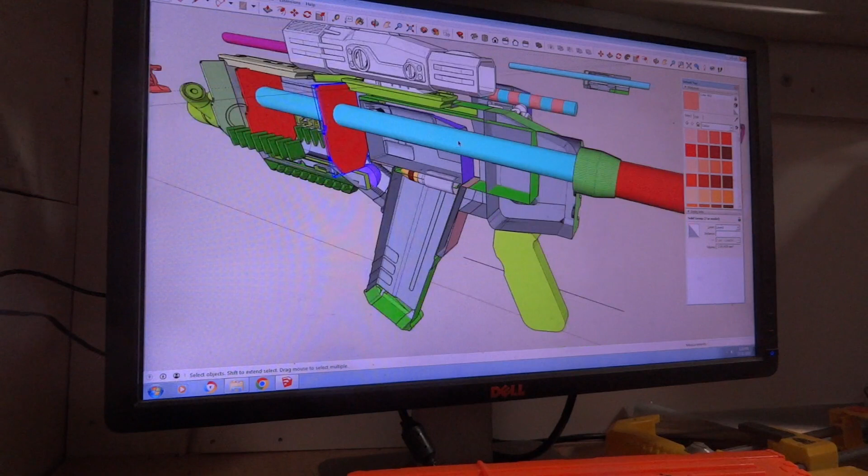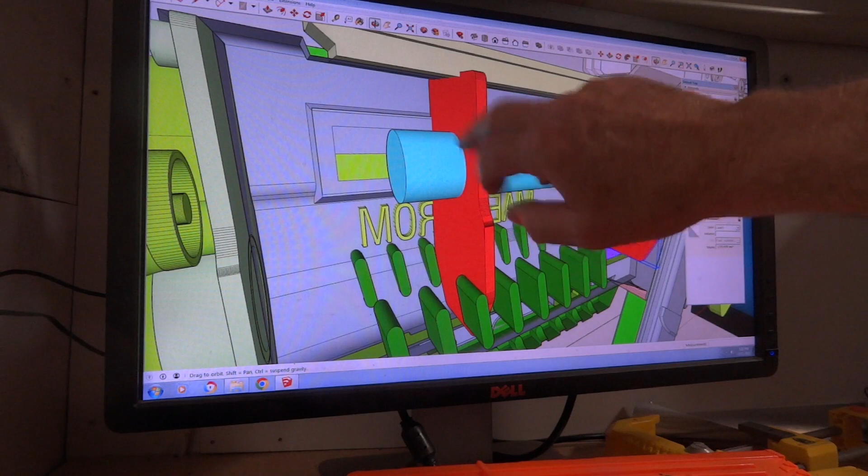Right guys, now here's our mock-up of the pipe. This blue goes all the way back through here, starts up the front, and we'll probably have a plate in there, moulded in a lot better, but a fixed plate in there, or lugs built into the side with sloped support, so when it prints it doesn't need any supports. And then we'll print out two plates with a hole for this, and it'll screw straight in, one there at the front, one towards the join that's going to be around here somewhere.

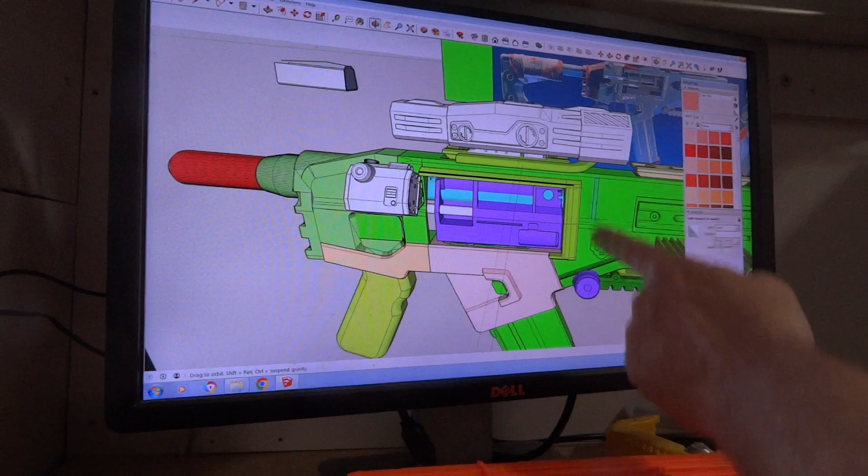Not actually sure, but what I was thinking last night, what I might do is make this section from about here to here one of the sections, and have a plug built into that so it plugs into the back of this section, and in that wall, in this part, there will be that plate and that hole.

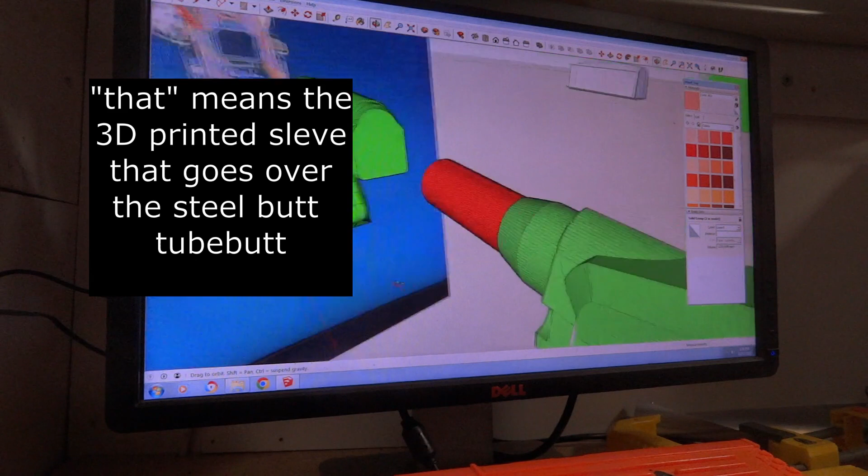And the pipe goes all the way through, and this little red one represents this one I've just printed, which is a nice snug fit, so that could fill out the back of that and still fit with the actual buttstock. Goes in fine, won't be anything hanging over, so that'll be good.

And what I've done with the pipe, when I finally got the right size, I took it into the bolt, intersected with the bolt, and now when you move the bolt, you get the movement of the barrel. You can see it going through, which is pretty cool, I reckon.

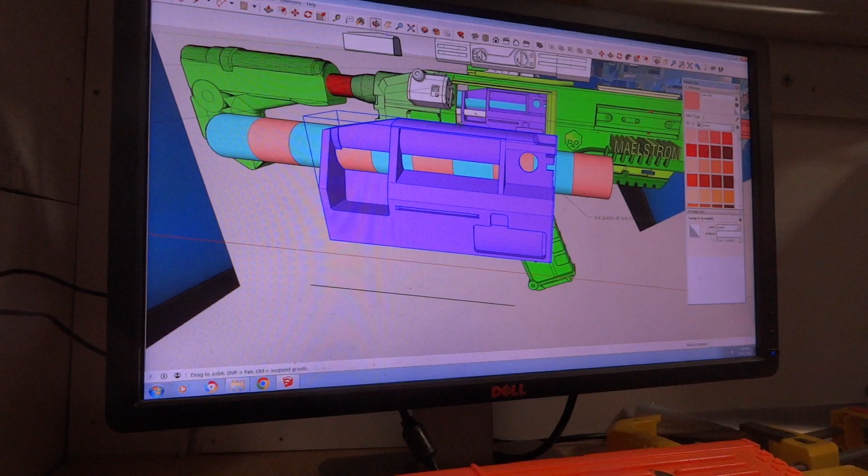And I'm probably going to put in a cocking handle, maybe using one of these holes, extending this out a bit and putting a nut in there that I can screw something in. I'll have to put a cocking handle in because you want to be able to see the bolt move. A couple of things I've still got to work on.

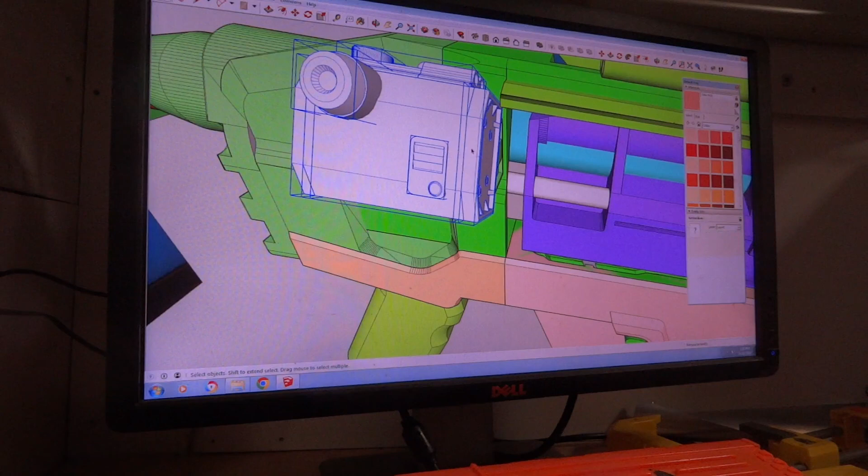Oh, I did this little box as well, this whatever-it-is round counter, and what I've done with that is I've made it all into individual pieces. I haven't combined it yet. When I do, it'll probably be the center section with all these things stuck to it, and then the two ends. And the front end's pretty basic, very simple.

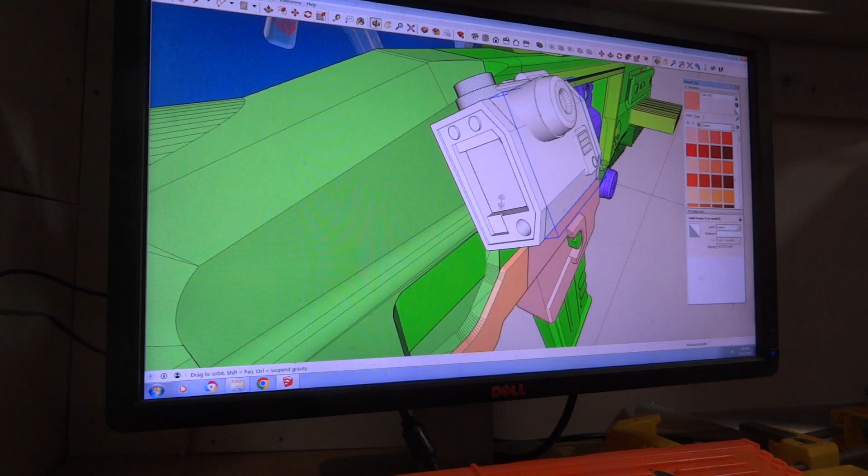The back end, it looks as if it's got a round counter in it, so I might see if I can find one to fit in there. So I've recessed that and got a hole ready for an LED light. Things got LED lights all over it.

But that's where I'm at the moment. So I'm pretty happy with that little thing. I'll get to combining that all later. I'm pretty happy with the barrel and everything. And I think I'm virtually done, except I've just got to go over and do all the little details. So I like those two little lugs there, I've got to add them to here. And there's all little bits and pieces all over the place that I've got to sort out.

So I'll also use these two rods. I'll just anchor them at either end straight through. And so this end of the rod will also be anchored into that end cap that'll be built into this part. So it's two on either side, and it'll be very well supported.

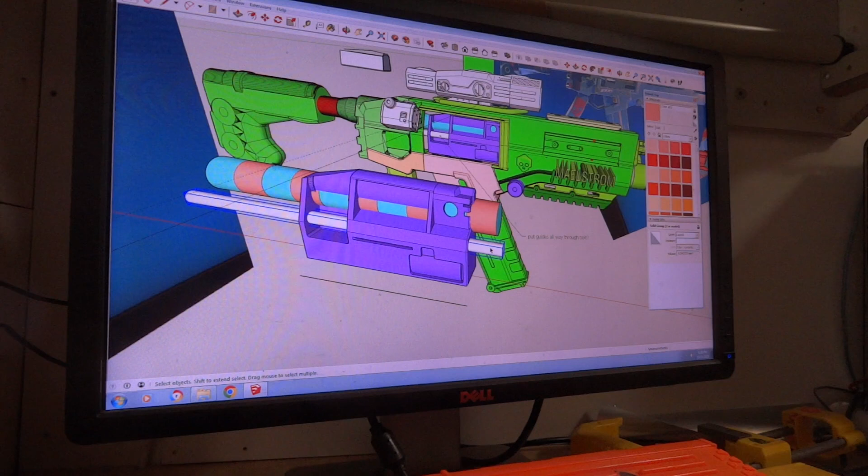I'll make them out of like aluminium tube or some copper pipe or something, so it's not like it's going to be plastic and it's going to snap. And we'll find a Nerf spring that'll fit the back of this, which shouldn't be a difficult problem, and we'll chuck it in the rear end.

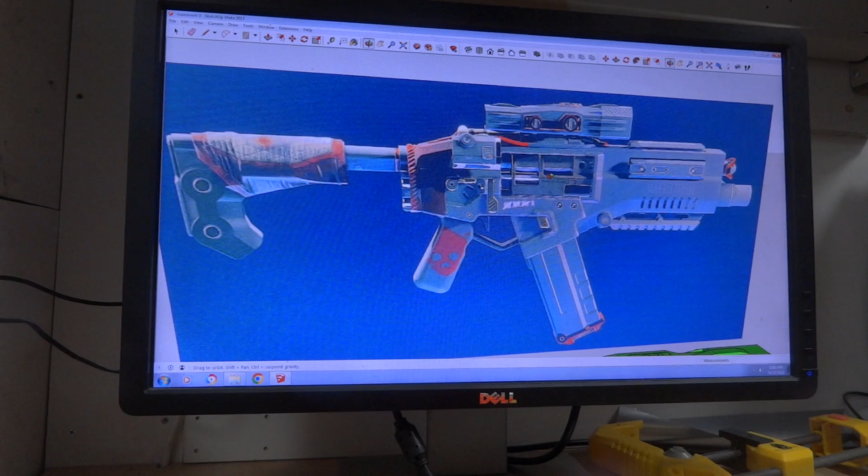Hi guys, Andy Work back in. I was hoping to avoid this, but it happened anyway. The last place we left off, it looked pretty unfinished. Well, today I've just sat down for 3 hours and made a lot of progress. There's our Maelstrom. Now there's still areas to finish.

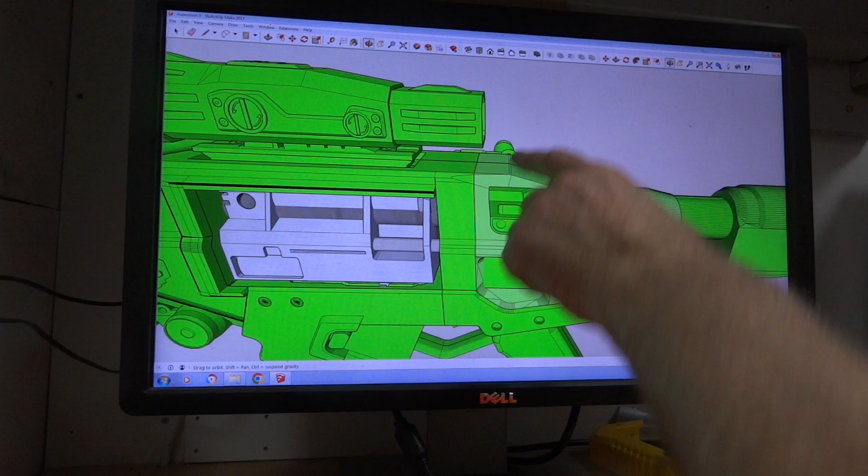I've still got to do all these switches and work out the internals so the bolt can move back and forward. But we've got the bolt, we've got our little doohickey box there. I've even modelled this little holder for that hose that comes over here. What I'll do is strap a couple of strips of metal, screw a couple of strips of metal that grip that hose, which you can see.

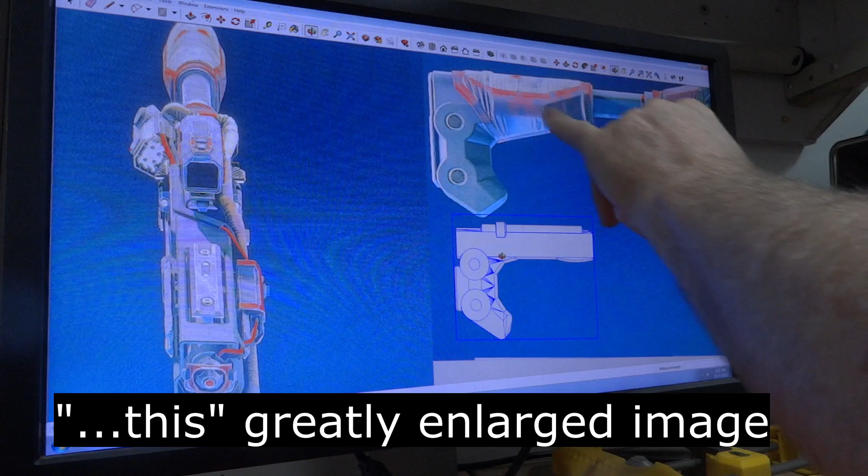When I did this I just had a flat plate, and obviously there's this big chunk out of it, and that necessitates the actual rear part going out, being wider. It's a different shape than I actually drew because I didn't observe it very well.

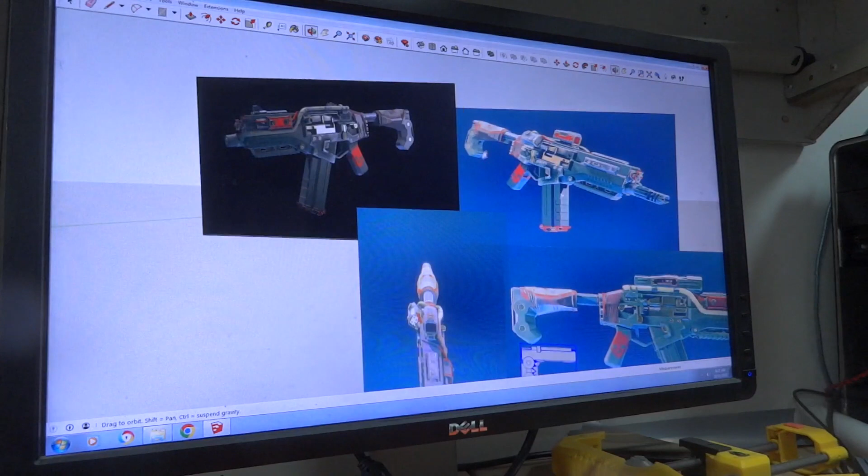There's a small half circle sort of chunk in the front that takes up a bit, then it bleeds out. In one of the other photos, it's a really good example, there it is. You can see how it sort of comes out at an angle. The trouble is it also goes back into this area here, and that part from the back is pretty good, I'm quite happy with that.

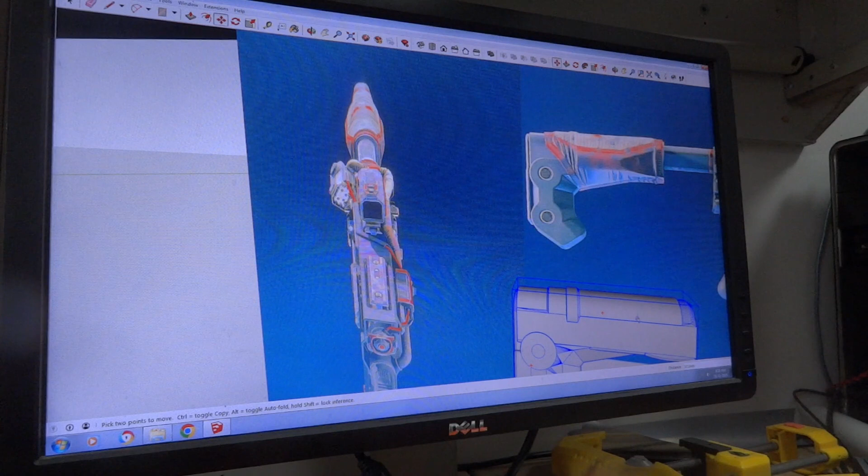I really don't want to do anything there because I spent a lot of time doing stuff there. So what I'm going to do is try and put this fat bit from here and blend it in just at this ridge, so it comes in about the same level as that. I'm going to see how I can do that. I have no idea, but I'll give it a go.

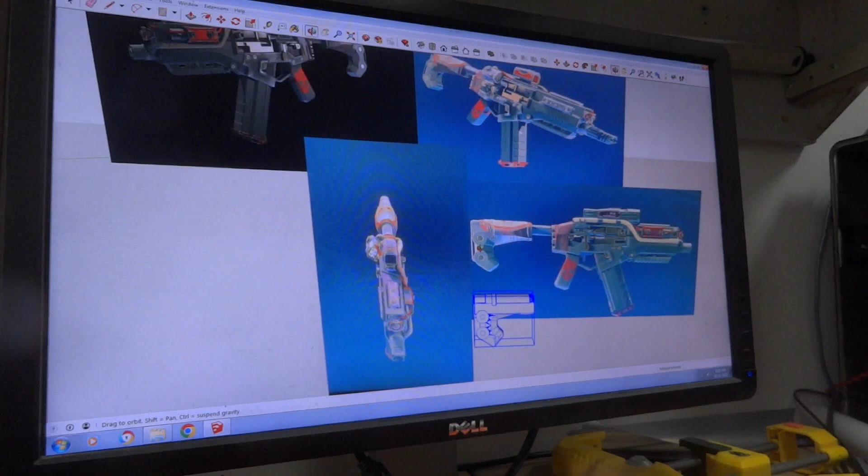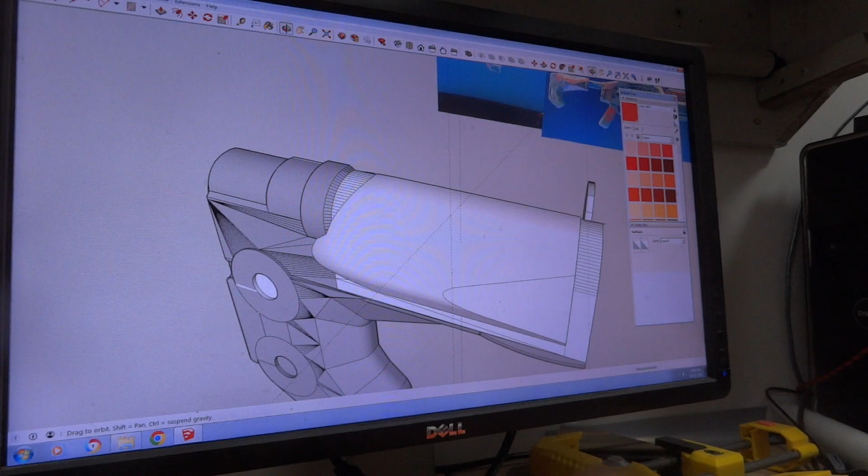I've just finished doing this piece, and it was basically just drawing this red shape here and extruding it along. What I did with SketchUp, there's a tool called the Follow Me tool, and you can extrude something along a curved path. So I've just dragged it straight along and then curved it down out of the way, and I'm in the process of deleting these parts, but it blends in there pretty well.

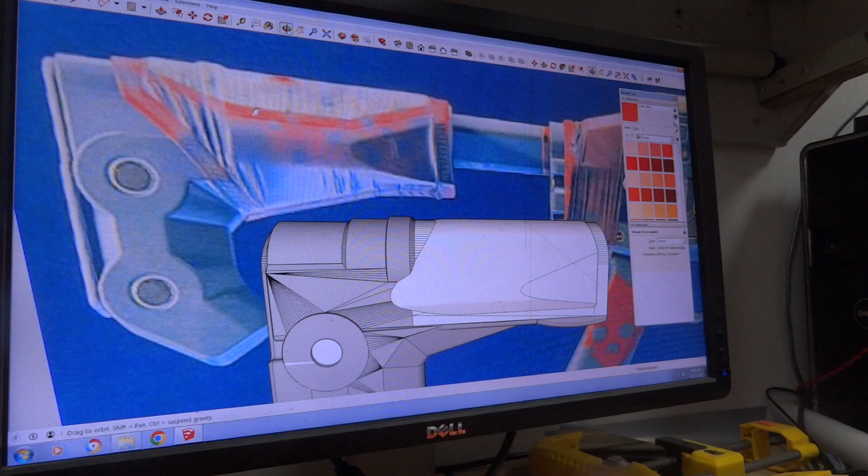As you can see, I've got the flat end and the curve that goes back, and it seems to suddenly stop here, which sort of makes sense. But I've just made it a curve to make it a little more aesthetically pleasing, and also so there isn't a sharp flat sticking out in the butt, because on the other side it would probably dig into your shoulder, depending on left and right handed.

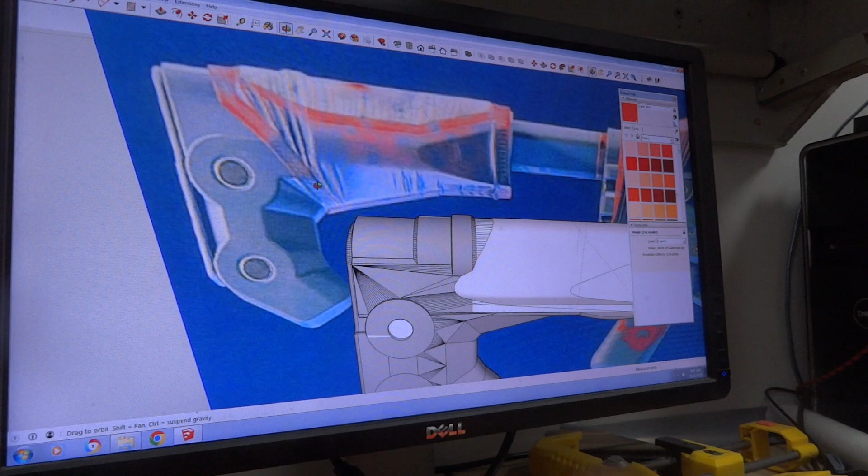It's going to be covered with this, I've been thinking of this as a pair of underpants because that's all it looks like to me, but I'll work out something there.

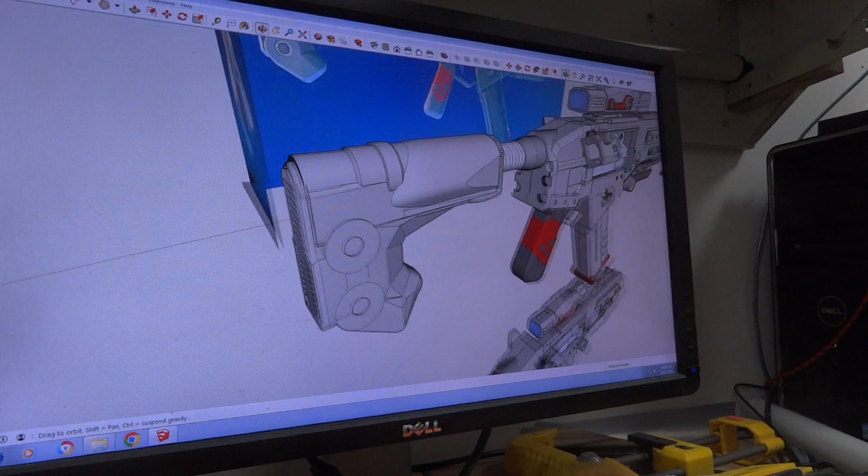So there's the original butt, and yeah, that area was bad, so was the front, but I managed to draw something a lot better I think. We've got this nice flat plate, and we've got the curved side, and I think it looks a lot better, also a lot smoother against the side of the shoulder and the face where you rest your cheek. That worked really, really well, so I'm very happy with that.

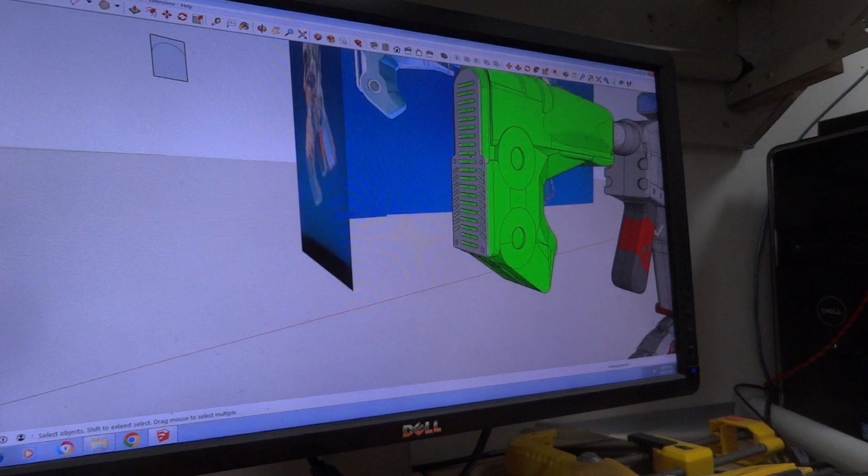And that now is going green, and it actually fits with the butt plate a bit better too. Now what I'm going to do is just put some points where these alleged screw holes are, put some protrusions, some indentations in the butt, and just glue it on. I want to print it separately so it's got a nice smooth surface.

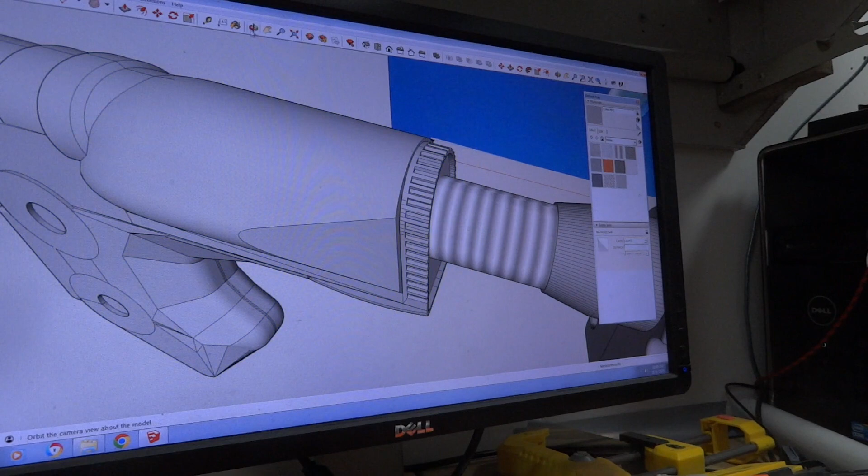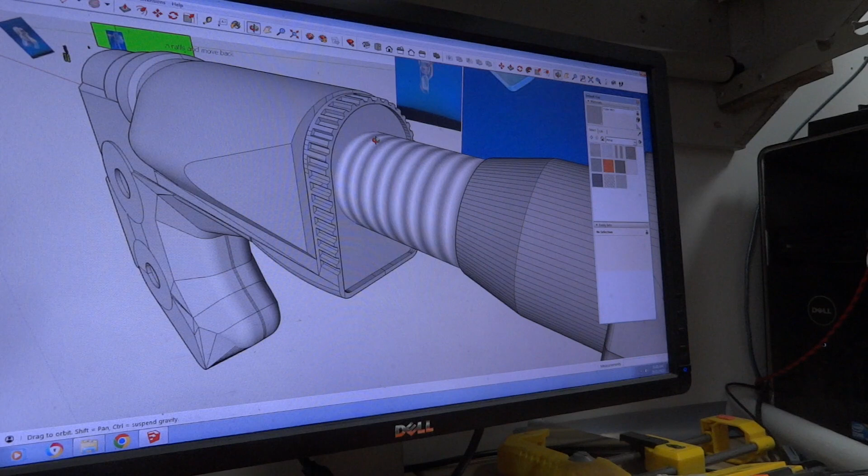Also, I've put all these little indentations around the edge here. You can just see them through in a couple of drawings. I don't know, it could be elastic on the underpants covering that, or probably is. But anyway, they're there. And obviously this area is naked, bare, because I haven't decided on the size of tube, and when I come to it I'll put a little bit of detail in there, but that will just have to wait for now.

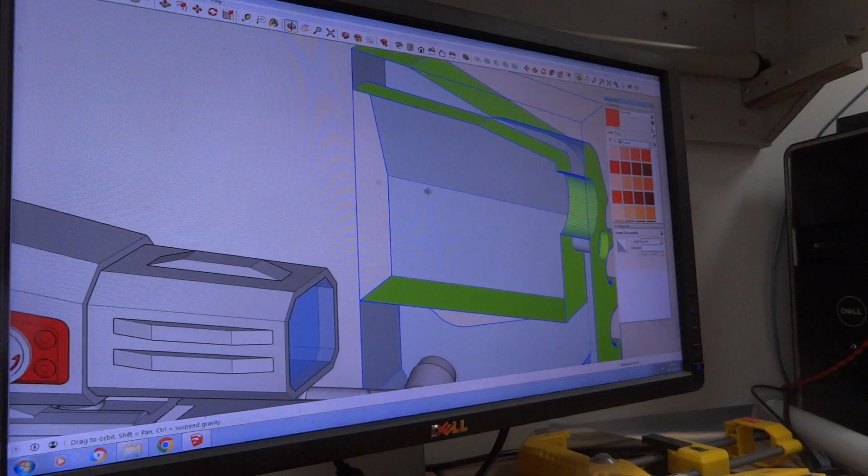So what I've done, this back end, I'll drag it up. I've cleared this space for the bolt to come back as far as possible, and I've incorporated a hole here which will take a bolt. Now luckily I've found some threaded rod in my shed, it's 6mm I think. I just got to get some nuts, and that will go through that hole right up to the front support plate.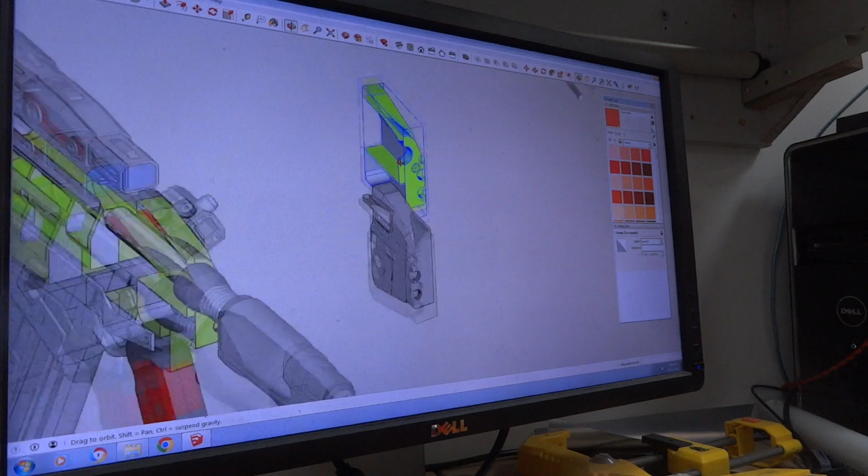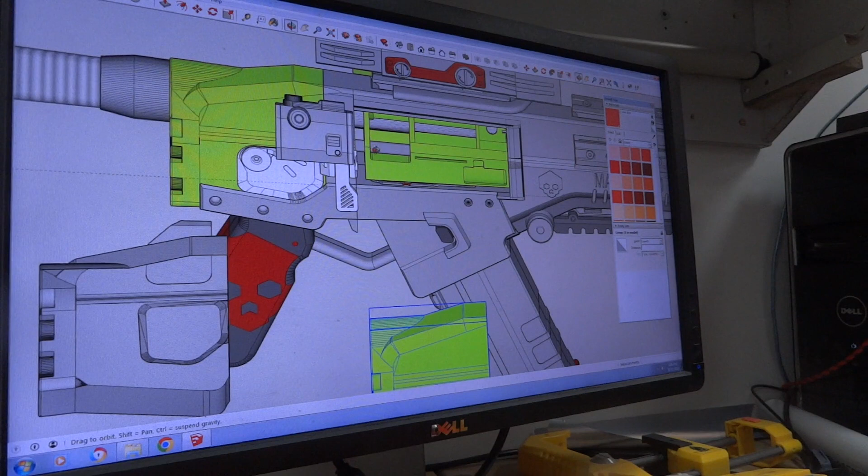So right through there, right up to here somewhere where there'll be a plate, and that'll be screwed in at one end and bolted in at the other, that sort of thing. So that'll give me a little bit of additional strength, and that will run through this piece of pipe, which is going to be from there to this bulkhead. That'll probably be about 8-10mm, probably 8, the smaller I get it the better. So that'll give me the 2 rods plus the piece of pipe the whole thing will be running on, which will be really well supported.

And in addition to that, that actually didn't take long, that took about an hour. The other 3 hours were just doing these 3 little bits, this detail stuff.

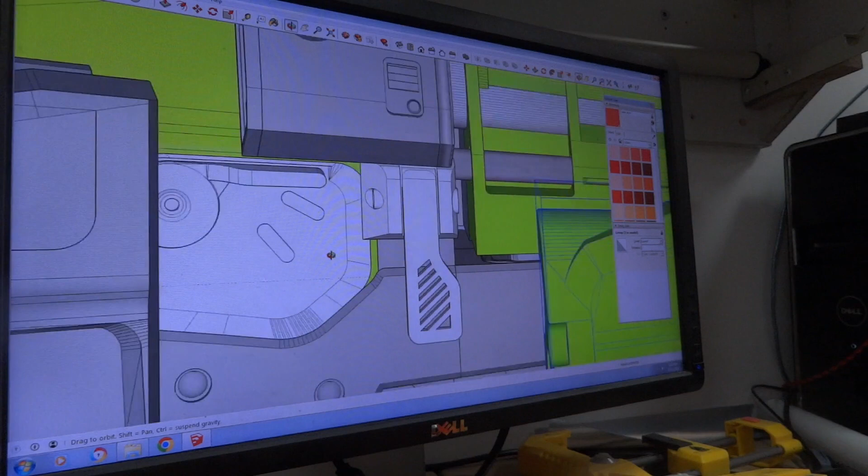Yeah, just doing this little stuff. The proportions to this and this flat switch thing, whatever it is, bolt release maybe, that's what it seems like to me. And they're still working on somewhere to put a cocking handle. Got to get to that. And that goes on both sides, so that's not a problem.

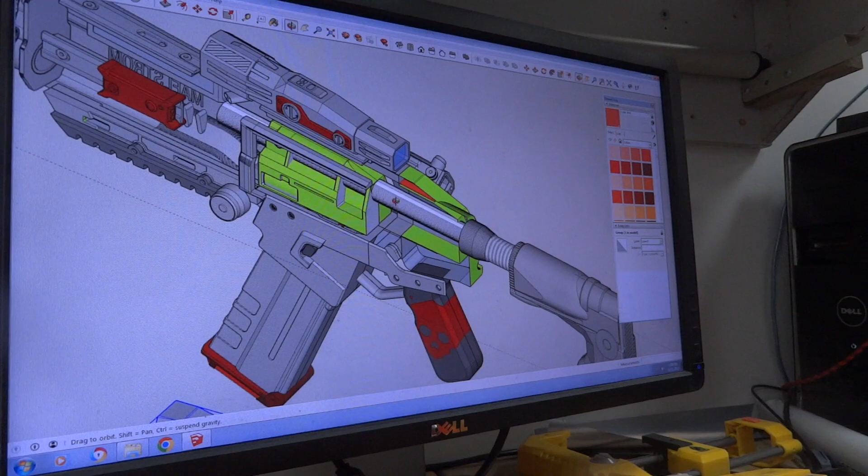I can just copy and flip that, and that's where I'm at. And I think that literally is the last major piece of detailing I have to do, so I can start working out where the cuts are going to be.

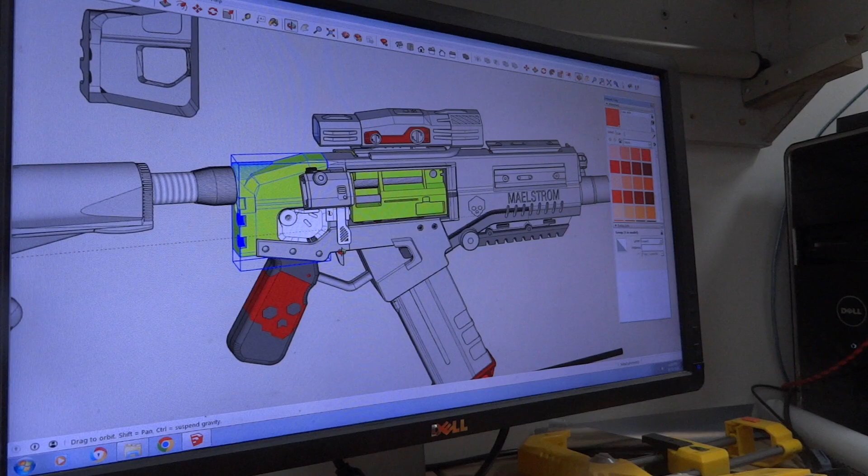Now what I'm planning to do, this green piece, I'm going to print as 100% filled, because it's got a lot of tension. It's got the pipe coming in the back, the two rods going up there, and it's a very small piece, and it's also got to have the pistol grip attached to it and a trigger mounted in it and all these things, which hopefully I will make movable. That can be 3D printed.

This thing I think I may actually have to cut out of a bit of mild steel and put a hidden pin through there, because it seems to pivot at that point. So issues to get on with and problems to solve, but I'll get there.

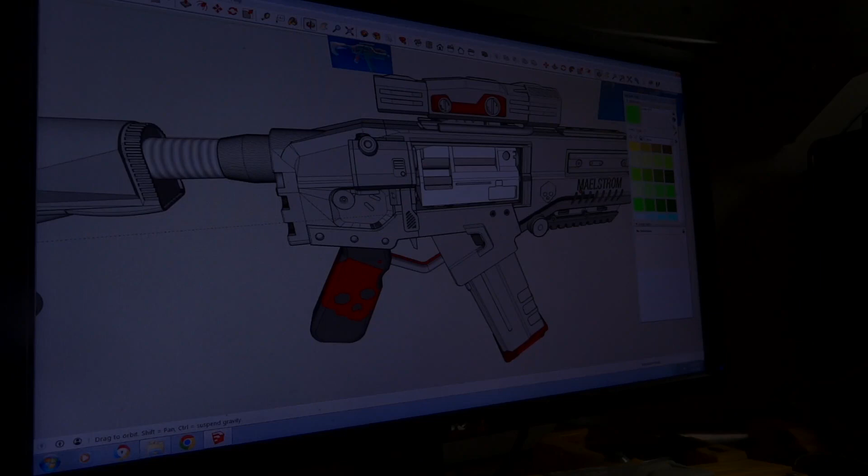Right guys, okay, just been doing some work. Now it doesn't look like much has happened, but actually a lot has. So what I've done is first remove that little bad clamp. I've got to redo that, that's not a problem.

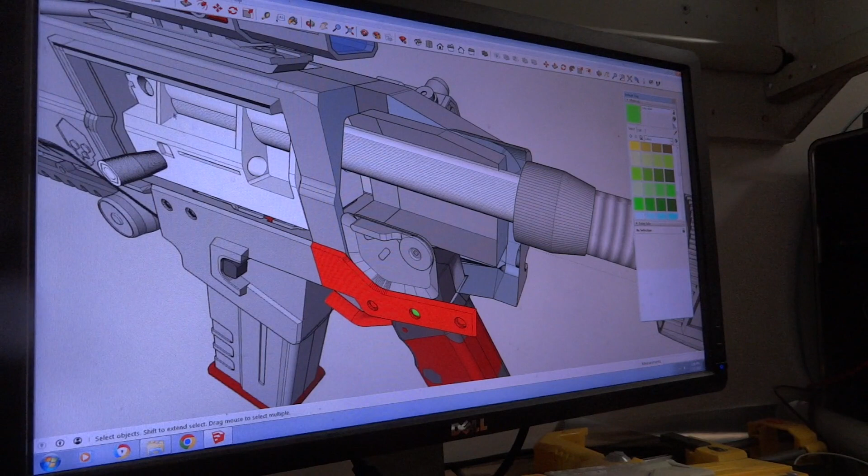And I've also, let me just remove that, modified these to take the rearward movement of the bolt, and it's matched to the front bit, so there's no edge there that it can catch and get jammed up on. So I've got that. There's the bolt there.

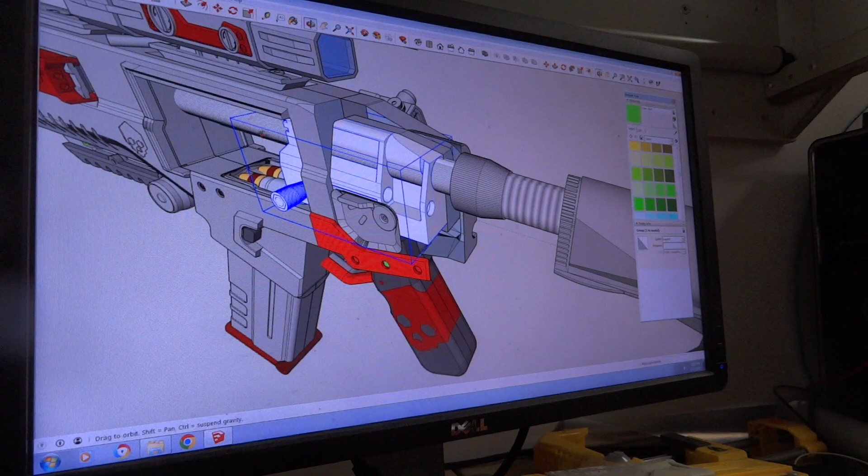I've even, when you draw back the bolt, let me just get it on this line, there we go, it goes back to about almost the wall, and this is the first time I've checked this, and the cocking handle I've put in is just hitting that, so that should be good.

What I've also done is recessed the front of this area. I'm going to put a piece of 3mm foam in there, so when this slams forward, nothing's going to be shattering and breaking. So there's that, done all that. Now get that back where it goes.

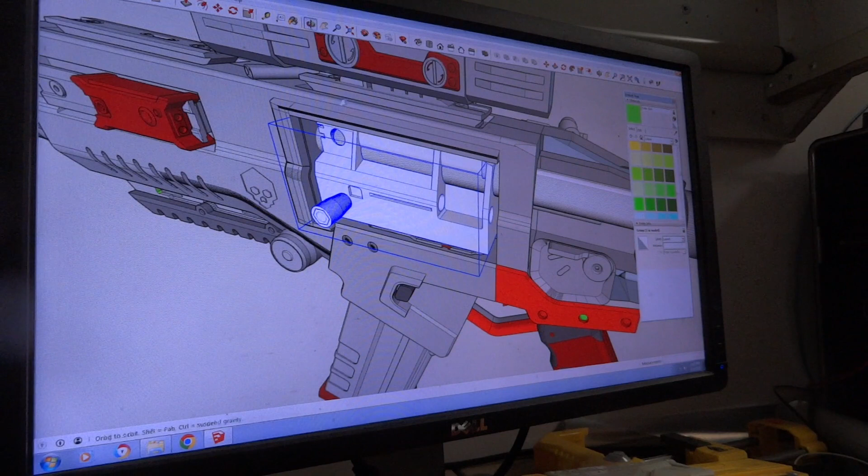And what I've also done is recessed a hole in the bottom of these two rear pieces. Just put that other one back. And what I've also managed to do is I've got the pistol grip. I've just got them grouped at the moment. Let me just drag it down.

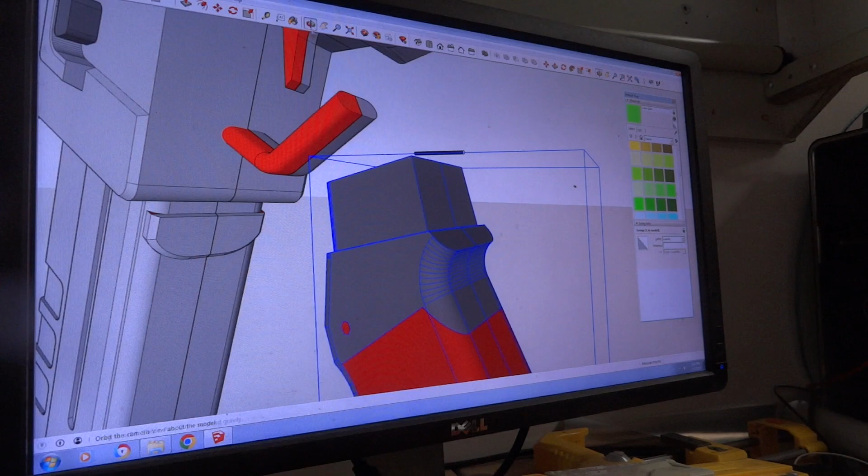So I'll put just a big fat lug in the top of there and a recess in the bottom of this. So it'll just slide in, bit of glue, but also that bolt hole there just happens to go straight through the center of it, so I'm going to modify that.

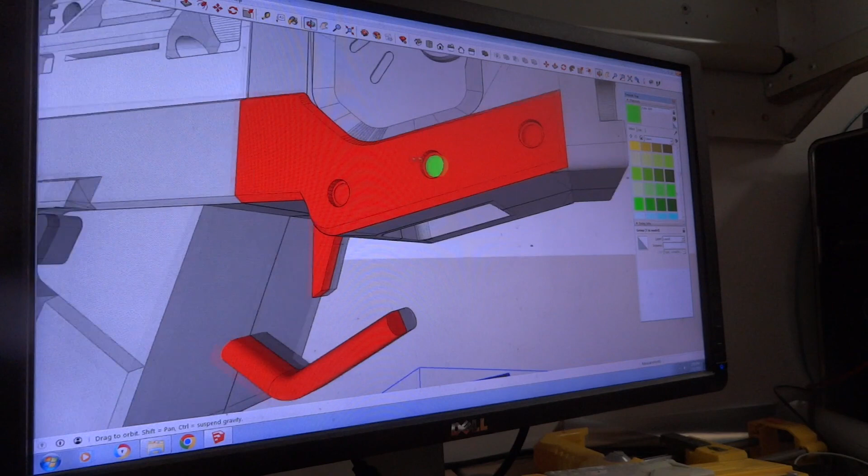That's why this plate is red, so to remind me. So I'm going to modify a hole that can go straight through, just like a screw or something, and also it's to remind me that the edge of this plate isn't blending with the body, so I've just got to fix that too. That won't be a great problem. And also anything that's red I've got to deal with.

I've got to put a trigger in with the spring. That won't be a problem. I've got to put the trigger guard in. I'll probably print this separately and just glue it in. So we're getting there by stages.

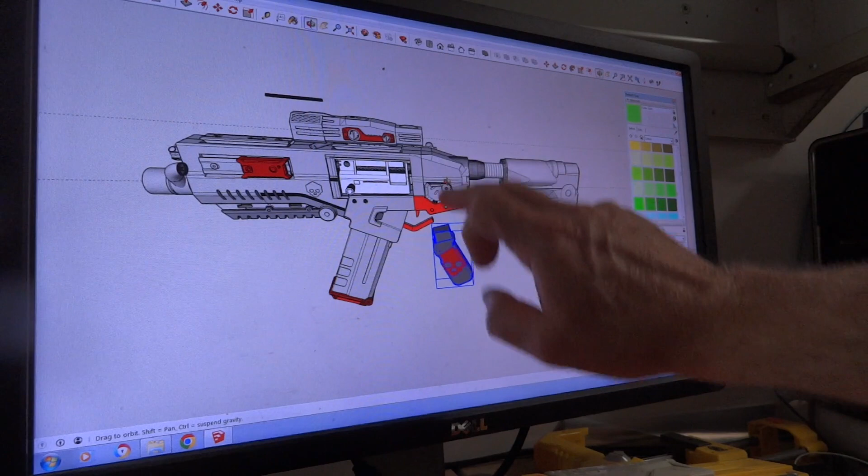And so this back end's almost finished. Then the center, which is pretty much done, because in cleaning up this I've had to clean up that side too. And then I've just got to put the cut in here and work out the join there. And I think, if I'm lucky, and I usually never am, that should be it.

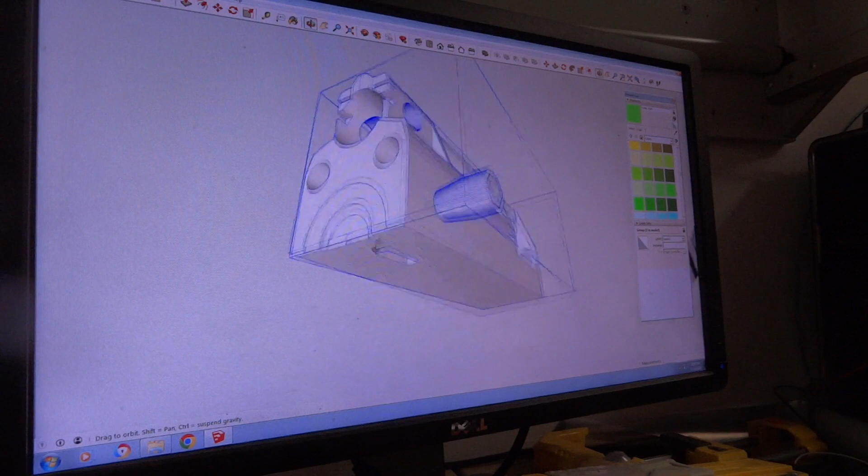I've decided to bite the bullet and put a cocking handle in, so you could call it a low caliber diet. Yeah, sorry. And what I've done, I've made myself just a mock-up of a bolt that I've got lying around here. So that'll go through this 3D printed piece, and it goes straight through the center of that hole, and I'll just slot a nut in there and tighten it up.

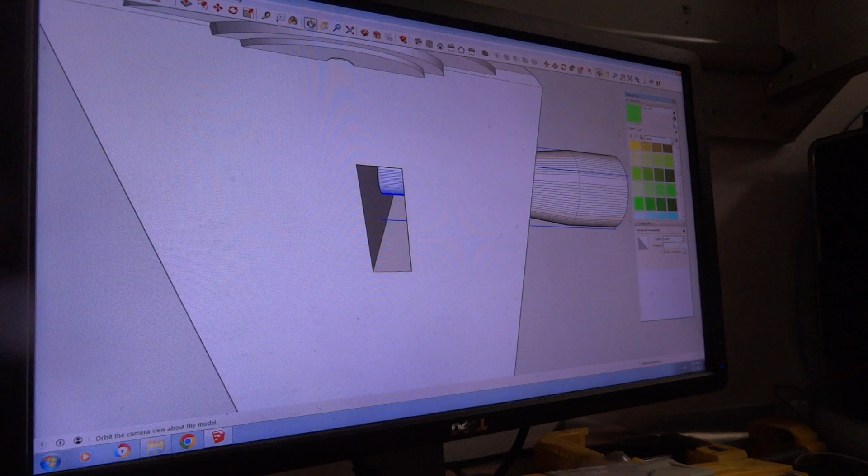So we've actually finally got a cocking handle. Yeah, you can see it in there, and we've even got something that looks like a bolt face. It's not going to be seen much, so I just did something quick and simple. I've taken the little corners off the edge of this just to make sure there's nothing it can catch on as it gets cocked, and we're good.